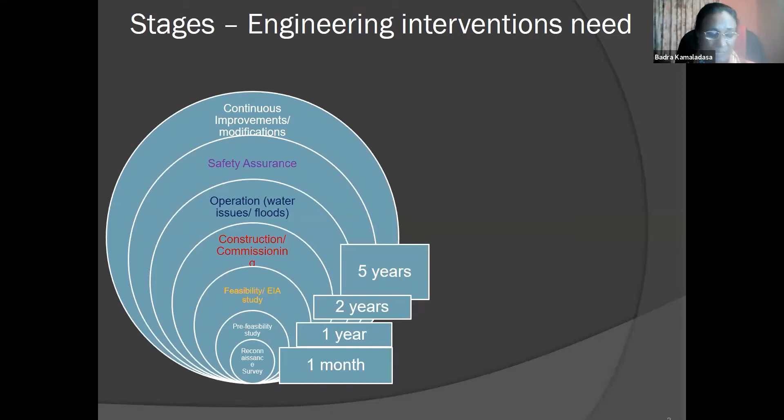So there's no need to say that at each step, involvement of highly experienced engineers and specialists is necessary, as most of the decisions are mainly founded on engineering judgments. So institutional capacity is very vital here: not only the personalities, experts having past experiences, set guidelines and specifications, skilled workers, skilled technicians. All these have to be combined together to make it happen.

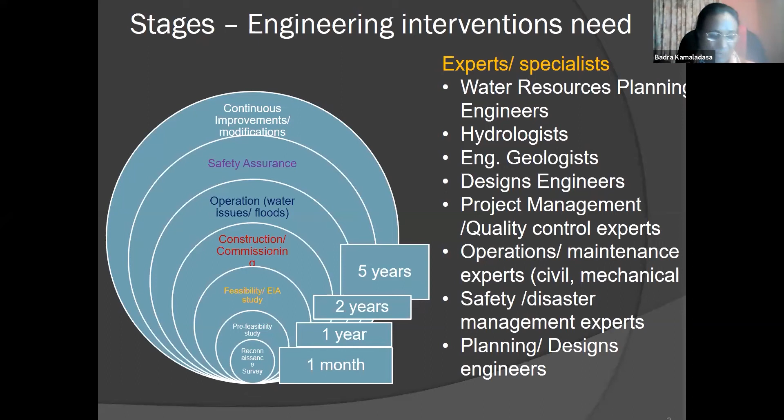So unfortunately, their names are not seen in any plaques that are fixed. At each of the steps, it is teamwork. Decisions need to be taken collectively, taking the subject specialist view into account. So if I go a little deeper and take one activity for you to get an idea, take what we do in the feasibility stage. Here, some basic actions need to be done.

We may need to conduct geological investigations that need to go down to the natural hard rock, many meters underneath, when we are to select the best suitable site for the dam. Then we have to make a good assessment of the prospective irrigable area when the locations and number of sluices are to be decided. The list goes on like this. So the minimum team of experts will comprise at least planning engineers, engineering geologists, hydrologists, surveyors, to name a few.

You also need geotechnical investigation results, surveys covering the whole project area, hydrological models, long-term hydrometeorological local data, and many more. So I'm sure you would have got an idea what precise decisions need to be made at each stage by the subject specialist.

Okay, let us see how the development phases of irrigation systems happened in Sri Lanka. With the currently available authentic literature, I can identify distinct phases, as shown in the graph. From the 6th century BC, starting from Abhaya Wewa in Anuradhapura, development up to much more complicated transbasin diversions is recorded in our chronicles, Mahavamsa, Pujavaliya, and many other chronicles.

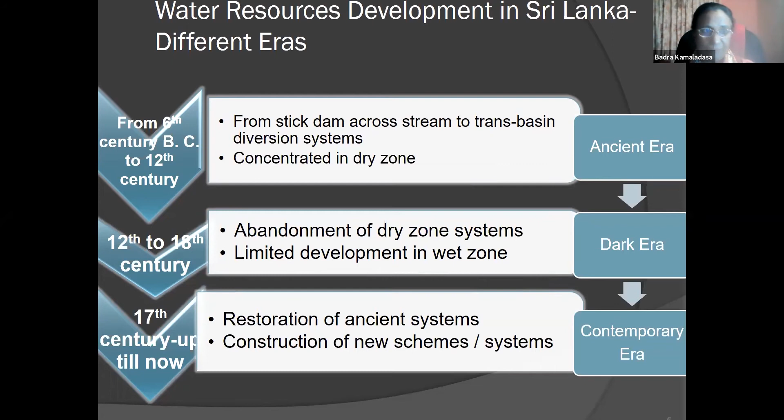Before going into the ancient era, I'd like to tell you briefly what happened during the contemporary era, because we have to understand the whole concept behind it. During the Dutch period, there were a few irrigation engineers employed by the East India Company, by the Dutch government, who had done surveys for restoration of ancient irrigation works such as Kantale Wewa and Giant's Tank in Mannar. They prepared some plans for the restoration.

Then they did some new constructions such as Urubokka Dam in the Southern Province and waterways along the coastal belt, which made some impacts on wet zone agriculture. The British colonial rulers started governing us from the late 18th century. And it is recorded that there were some purposeful destructions done by them to the remaining irrigation systems, especially in Wellassa. Even the British scholars themselves have written about these in their reports. It was after the first rebellion.

Then, however, after the second rebellion in 1848, British rulers realized that the only way to keep the inhabitants occupied is providing them water for their traditional livelihood, that is agriculture. So they started revival of ancient systems as usual, starting from legislations.

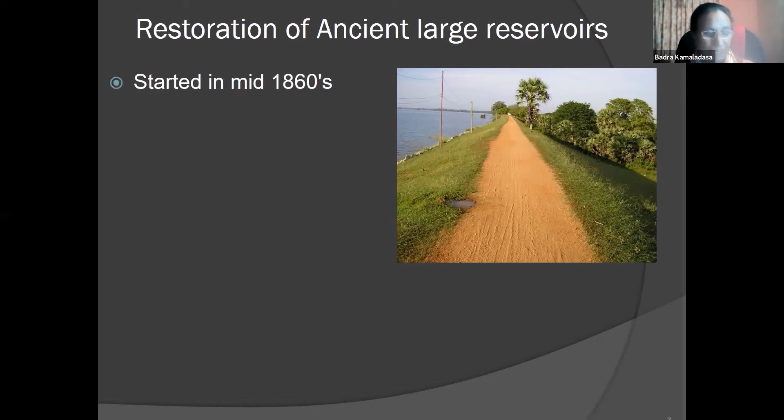Then restoration of large schemes such as Kantale, Kalawewa started in mid 1860s. Actually, the interest of digging out the history of Sri Lanka by the British rulers was a result of translation of Mahavamsa into English in 1836 by a scholar called George Turnour, who was working in Ratnapura Kachcheri at that time, I learned.

So it was a fashion actually among the higher ranking officials of the government, from the governor downwards, to visit the ancient irrigation systems and collect historical, social, and technical information on the schemes, which remain, I must say, valuable records to date. So you can find their handwritten notes at the National Archives if you visit, which I like to identify as the national treasures. So I will complete the story of the contemporary era with this slide.

The two new reservoirs added to our topography in 19th century were Kirama Wewa and Labugama reservoir by the British rulers. They started planning many irrigation systems in early 1900. Iranamadu in Kilinochchi and Unnichchai reservoir in Batticaloa are the first two large scale reservoirs done in early 1900. So they added some flood protection schemes, saltwater exclusion schemes, especially aiming the wet zone agriculture too, introducing new technology to our country.

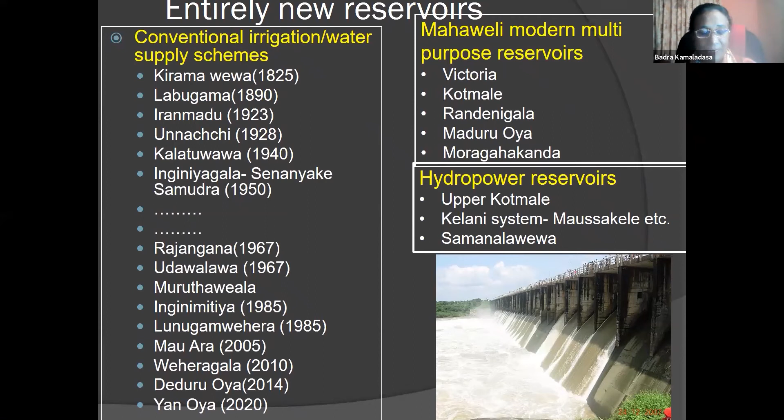So the saga continues. There are more than 50 new large reservoirs by now, which were not in existence during Sinhala Kingdom. So with all these new reservoirs, with the ancient reservoirs, we are a reservoir-rich country, I can say, comparing with the other countries, having a very high density of reservoirs per capita. So having completed the story of contemporary era, let me go back to explain some interesting facts in restoration of ancient irrigation systems.

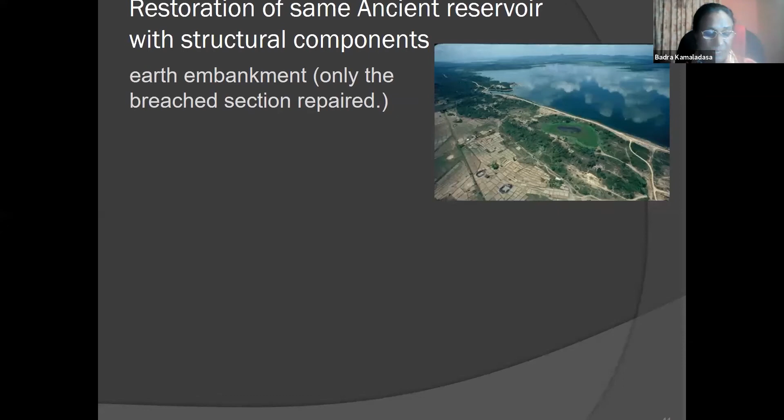Similar to making sound judgments in new construction for new reservoirs, the irrigation engineer needs to look into various factors in finalizing the restoration of ancient systems while planning. So let us see what they have to do. Now, we have to decide whether we can use the same earth bund and remnants of sluices and other components while restoring the ancient system. There may be many instances where the same earth dam and sluices were repaired and treated, while the new spillway was located on the same location that the ancient spill was located by our ancient engineers.

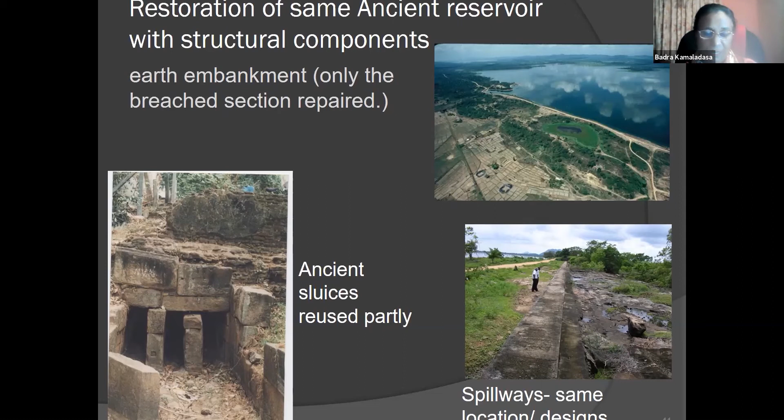So major reservoirs like Kantale, Kalawewa, Nachchaduwa, Hurulu Wewa are some of the examples for such schemes where the same embankment, same dam, and same location for the spill, and also some same sluices were used for the new restoration work. Some ancient abandoned systems cannot be revived due to dilapidated conditions where some components are too weak to get them into the new system. The remnant of the ancient dam in Rambakan Oya, the newly constructed Rambakan Oya, you would have heard about it, is one such example.

Now, you all have got fairly a good idea what sort of irrigation infrastructure is in operation at the moment in our country. So while other countries classify their reservoirs or dams by the height of dam, capacity of the reservoir, construction material of the dam, and the uses and benefits and all that, we have a special unique classification.

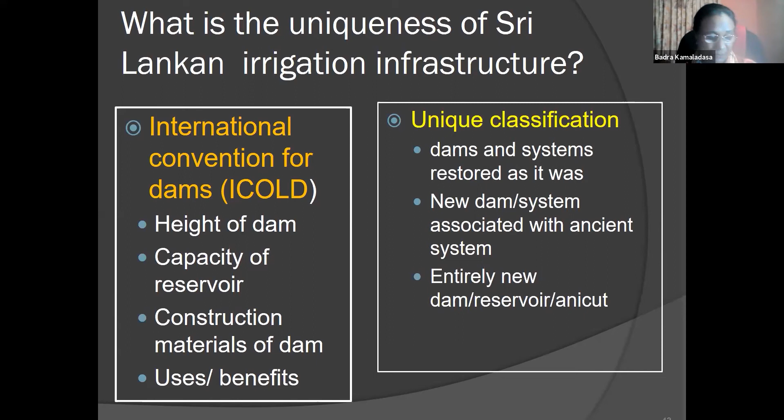So let us now discuss some amazing features of the ancient irrigation systems. That is basically my topic today, features I have observed so far while restoring them. Among many such features, I have selected only a few to highlight here.

If we study the ancient system, we can observe countless varieties of designs adopted by ancient engineers. You can't find this variety in modern irrigation engineering theory books. These are not conventional stereotype designs.

So the selection of suitable sites for dams and spillways, sluices or Bissokotuwa as usually mentioned, for water management, flood management in reservoirs, slope protection in embankments, and transbasin diversion - those are the topics I will briefly discuss today, sharing some of the experience irrigation engineers have gone through.

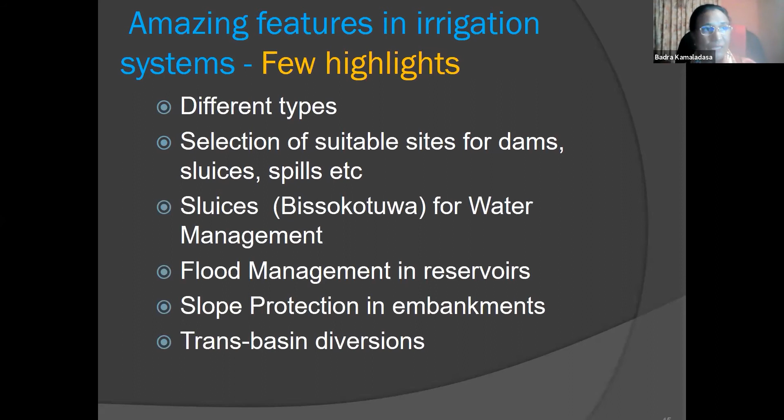The extensiveness and variety of our ancient system were revealed only after the completion of the topographical survey maps covering the whole country in 1900. Until then, no one had a proper account of the irrigation infrastructure the country possessed at that time.

So I want to highlight this topo sheet here. As you all know, this type of topo sheet covers 1,000 square kilometers, and within this area you can count 1,200 reservoirs, including small and medium ones. No large reservoirs are shown here, but you can imagine the extensiveness of our irrigation works all over the country.

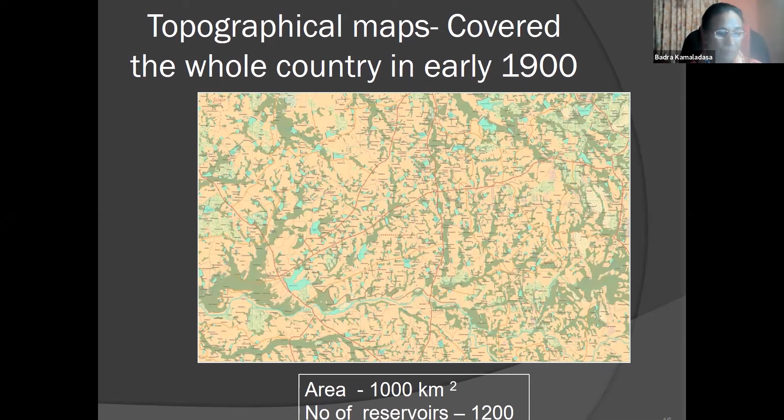Now, if I talk about the different varieties and features of irrigation systems, I would select this one as Type 1: a single small reservoir that evolved at the beginning of the evolution of irrigation systems. Many of you may be familiar with illustrations showing the village reservoir and other associated features.

Scholars have identified that the Wewa or small reservoir is not just a single entity, but many other features have been built around it to ensure sustainability. The social and environmental fabric is closely knitted to the system. For example, to minimize silting and water quality degradation, a tree belt has been introduced around the upstream periphery of the reservoir. Homesteads are located at higher ground downstream, having easy access to the farms. These are only a few features.

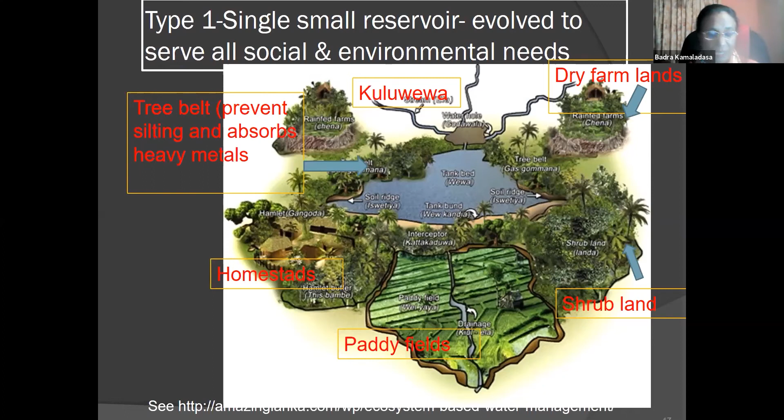You can find a lot of additional reading materials on the internet if you are interested in this regard. Then the second type is...

I would select the cascade system, which most of you know has recently been declared a UNESCO heritage site - the Sri Lankan cascade system. There are 150 cascade systems identified so far.

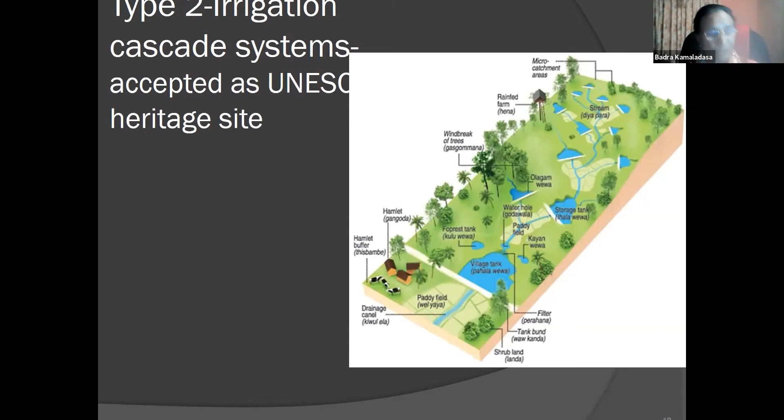Careful study of these systems reveals that small reservoirs in the system are interdependent, and perfect water-saving techniques have been used. These are ideal models to combat climate change impact, because the reservoirs are not independent - they always depend on each other, and water from upstream feeds the downstream reservoirs. Water shortage is rarely seen in this type of system.

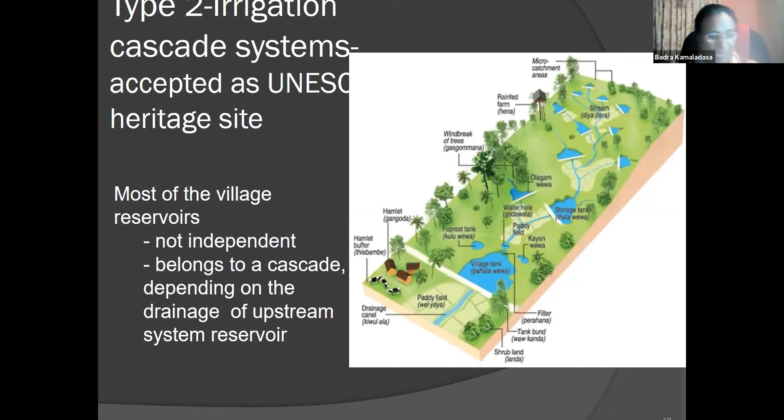Another type I want to highlight, the third type, is barrages across the main river. Even though international terminology calls them barrages, in our country we call them anicuts. These are especially constructed across major rivers - Minipe across Mahaweli, Alahara - these are very familiar names to you.

Another example I want to quote here is the Tekkam anicut, across the Malwathu Oya in Mannar. I'm sure many of you would have visited that place. If anyone in the audience has seen how violent the Malwathu Oya river is during floods, I ask them to think how this amazing structure remains intact for many centuries and has withstood countless flood events.

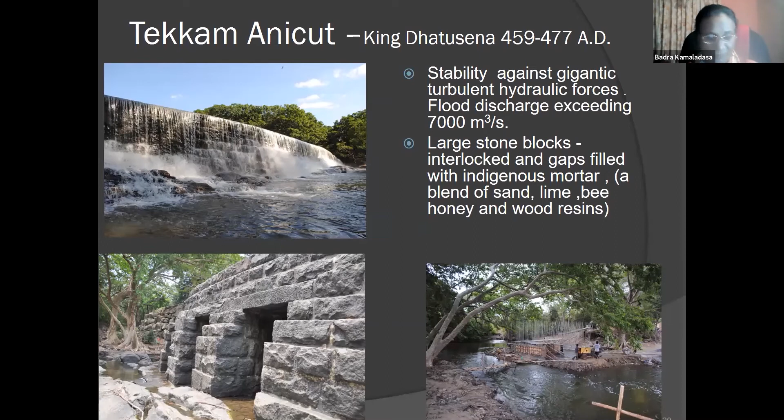Now, this is the fourth type I want to introduce as a next variety. This is Padaviya Reservoir that has only one sluice, and it releases water not to the main canal, but to the main river again.

Then pickup anicut, located downstream, distributes water to the irrigation system. This is a very unusual design. One cannot find it in the textbooks.

So when the British engineers conducted surveys in the 1880s to restore Padaviya Reservoir, they couldn't understand the design concept of the system. Most of you have heard about Henry Parker, a well-known famous British irrigation engineer, who studied the ancient irrigation systems and recorded in 1889 in one of his notes this quote: 'We may not be able to put this into a known design model now, but the long experience the Sinhala engineers had over thousands of years would not have done a mistake. It will take some time to realize what is the concept behind this.'

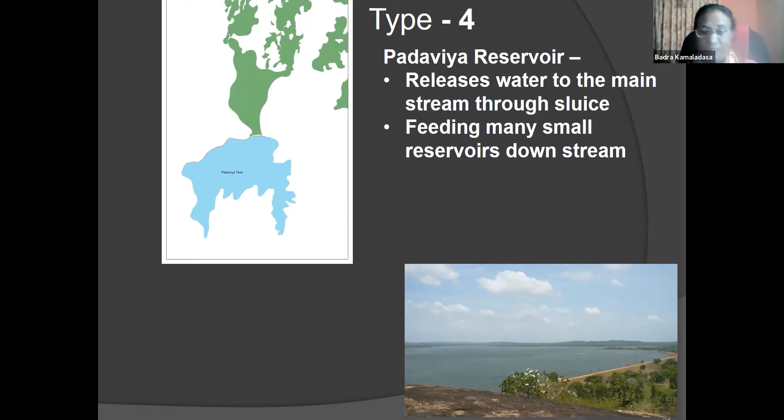So only in the 1950s could the irrigation department understand the concept behind it, and it was able to restore the dam that was 3.2 miles long, having a capacity of 85,000, and feeding nearly 13,800 acres of land.

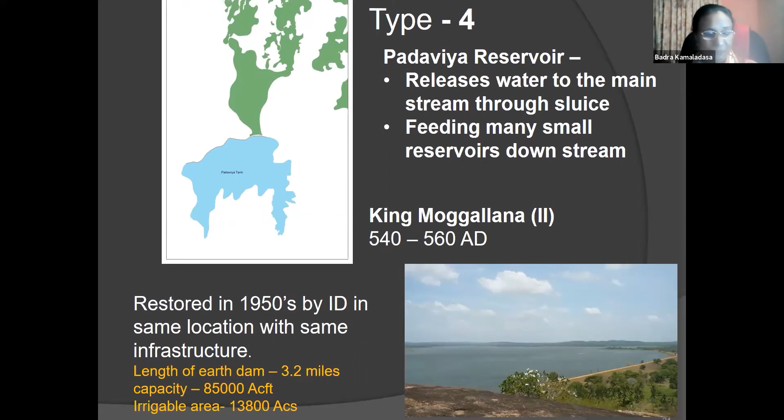Then the other type, these are very peculiar systems, that cannot be found anywhere else in Sri Lanka except in the Mannar area. And to my knowledge, you can't find it anywhere else in the world. So the giant tank is located in a small drainage basin. It is not located in the Malwatuoya basin, but adjacent to it, in a very small drainage basin.

What happens here is the reservoir gets filled up through the feeder canal from Tekkam anicut, which I showed in the previous slide.

Then there are nearly 162 small shallow reservoirs in the irrigable area. You can see the irrigable area with some blue reservoirs shown, but not all 162 small reservoirs are shown here. The irrigable area will be filled by the 10 major canals in the Maha season, to cultivate about 30,000 acres.

What happens during the Yala season is the water inflow is not sure. It will be unpredictable water that they get through Malwatuoya. So what they do is the small reservoir beds get converted to paddy fields, and cultivation is done on the Bethma method, limiting the acreage, while direct issues are fed by the main canals.

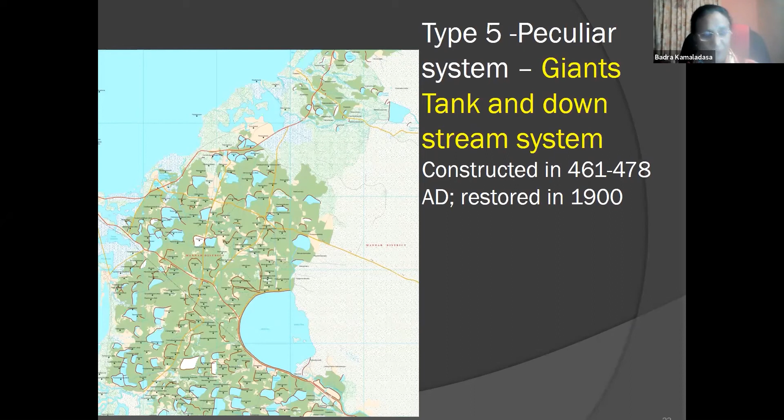Then the sixth type: this is a reservoir constructed not across the main river, but with a dam running parallel to the river bank. Usually a modern irrigation engineer will select a dam axis crossing the river. But here, it is not only Rugam — there are many other reservoirs like this.

Rugam River — the reservoir was constructed not across the main river, but on a small tributary coming to the main river. And the dam, you can see, is running parallel to the river. The river was flowing like that, and the Rugam Bund is parallel to the river. So again, this is a very unusual type.

And then the water is released — how? The Rugam tank gets water from a feeder canal built upstream of the river, and with the augmented water, the reservoir releases water again to the main river, to cultivate the irrigable area about 20 kilometers downstream.

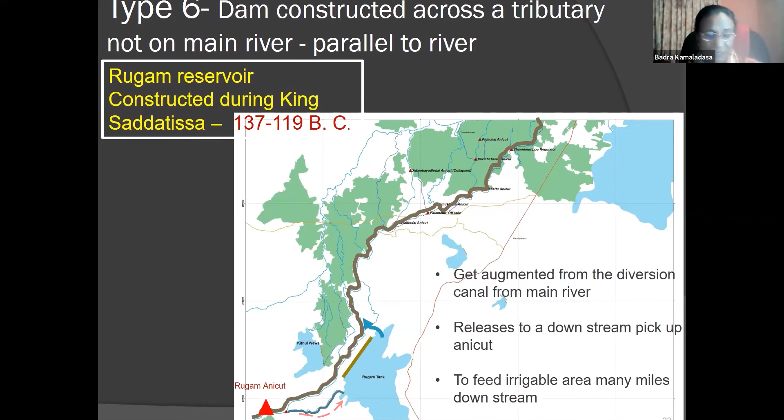Please keep in mind that this concept was developed in the 2nd century BC, not during the modern era. So how did they do that? How did they conceptualize this type of complicated system without drones, without precise survey instruments? That is still a mystery.

Then the other type: we can cite large irrigation schemes such as Kalawewa, Parakrama Samudra, which are made by combining many reservoirs. These large reservoirs are not a single one-shot construction, but evolved through centuries. You can see that in Kalawewa, the Balalu Wewa was first constructed by King Kutakanathissa.

That is in 44 BC, according to the records in Mahavansa. And then the next section, Kalawewa, the main Kalawewa reservoir, was built by King Dhatusena, as we all know, in the 5th century AD.

My observation is how they needed to have amazing knowledge to align those dams across different tributaries to finally form a single reservoir. So how did they do that? Similar to Kalawewa, Parakrama Samudra also consists of 7 small reservoirs, as you would have heard.

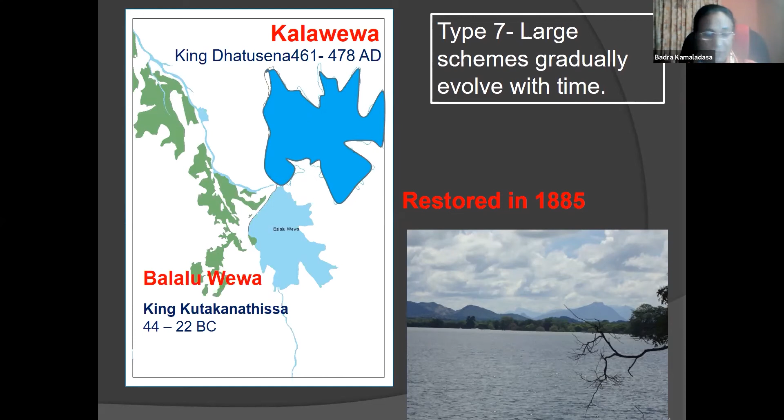Then the next type is the most advanced stage, I must say: transbasin diversion. I define it as the pinnacle of ancient irrigation technology we had. Imagine water transferring from Kalawewa to Tissa Wewa, going through an 87 kilometer length canal through gravity. Even now, with precise survey instruments, we have to put several experienced experts together, and it is not one man's job but several people's work over a few months or years to set out a canal like this.

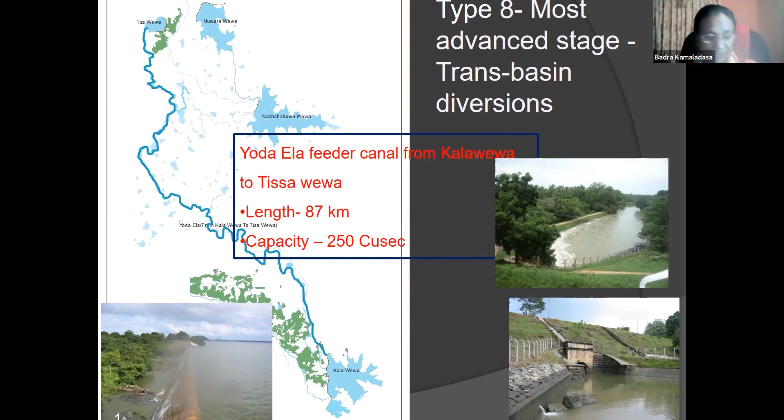So the next amazing feature in ancient technology, as I listed out, is the selection of suitable sites for the dams, sluices and spills. Now, when locating Maduru Oya...

You can see this topo sheet. I am not sure whether it is clear on the screen. When locating the Maduru Oya Dam under the Accelerated Mahaweli Project, the planning engineers in the modern era had this topo map. It indicates the best suitable site, ideal with topographical features for a large reservoir, so they wanted to locate a large reservoir here. But you can see in the topo sheet from 1975, it shows only a small reservoir, a trace of just a small abandoned reservoir with a small dam. So while doing the feasibility study, the engineers came to know the extent of the ancient reservoir, and it was close to the new design.

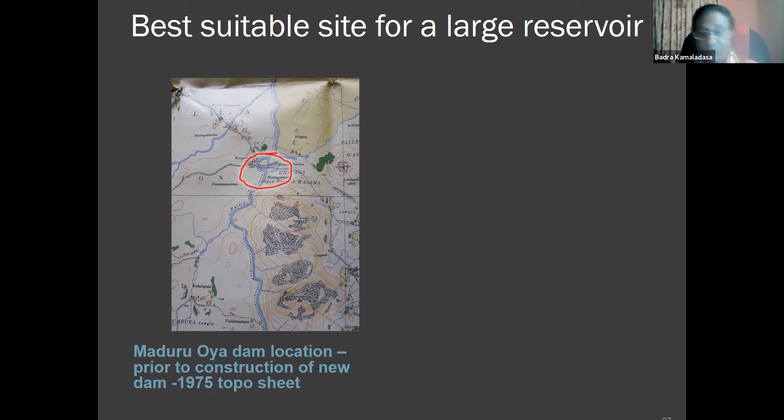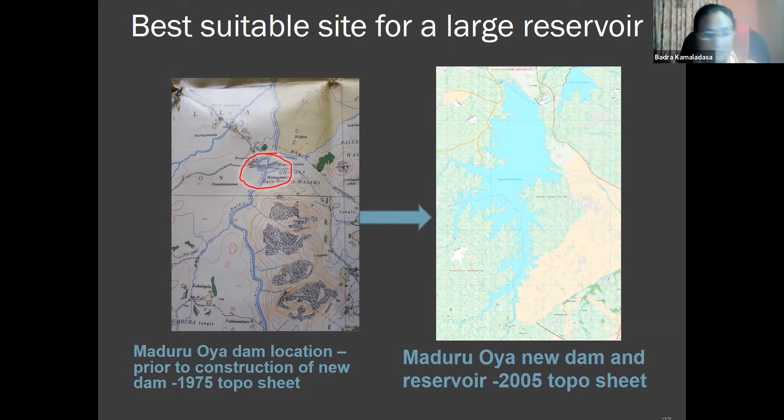You can see in the new topo sheet, which I took in 2005. Comparing to that, they would never have thought that a large reservoir on that scale would have existed in the past. So, selection of suitable sites.

Ancient engineers selected the most suitable sites to locate the spill. That is another amazing capability they had. One needs to judge whether the downstream of the spill can handle many considerations when locating a spill, whether it is capable of absorbing the giant force created by spill water, foundation conditions, and things like that. In many large schemes we restored, like Nachaduwa or Kalawewa, the spill site has sound rock outcrop, which prevents scouring and is very suitable for today's spill location as well.

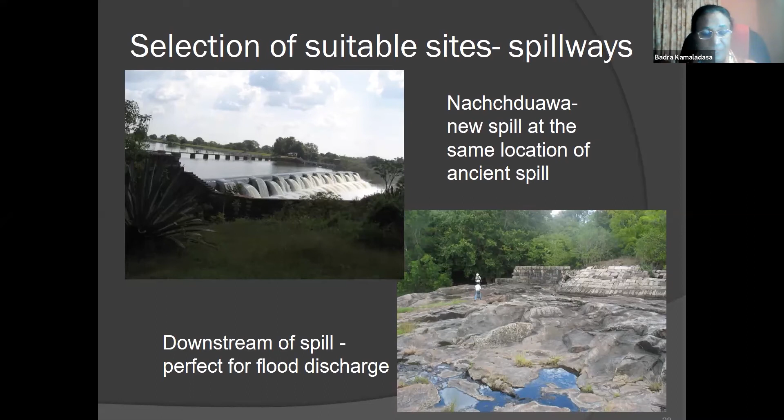Then conventionally, selecting a suitable site for a sluice is again a challenge for the irrigation engineer. The ancient engineers selected the most suitable sites for these structures. Usually in modern dams, the sluice is located in the main dam. But in this ancient Vahenery scheme, the sluice is located not in the main dam but in the saddle dam. The sluice feeds the irrigable area through the main canal in another place, via some other way.

The modern planning engineer has to go through hydrological, geological, and structural considerations. Ancient engineers must have considered all these things too, even though we don't have any trace of their records.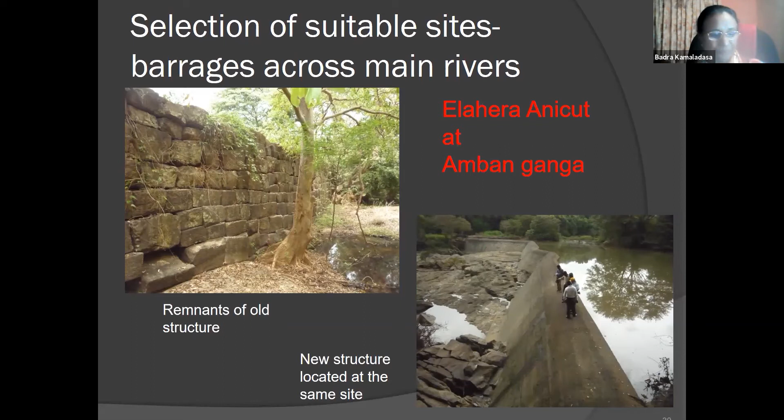Then the sluices in the Biso Kotuwa, used to control release of water, are another marvel. If you go into more detail, we were talking about the suitable selection of sites for the dams. Now I am going into more detail about the Biso Kotuwa.

I'm sorry, it's 32. Yeah.

Here again, it is not the typical uniform sluice you can find in ancient systems, but a vast number of varieties. Actually, the British engineers recorded that they found valve pits, as they called it in the 19th century, that is available only in Sri Lanka, and suggested that it is one of the crucial factors that contributed to the success of our ancient irrigation system. So that is why the Bisokotuwa is always quoted as a marvelous feature in our ancient system.

Now, this is the famous Sorobora sluice. Many of you would have seen this. That is carved through the natural rock. Two sluices are there in the dam in both ways. So I wonder whether any modern engineer would have got such an imagination and skill to transform his or her design concepts so precisely.

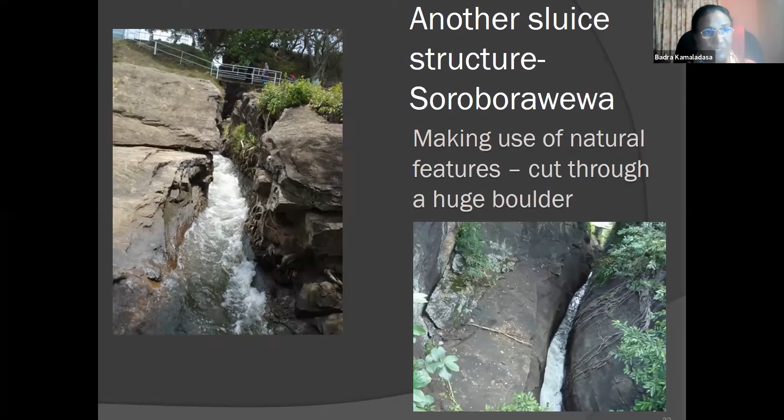It is amazing. And then Maduru Oya sluice is one of the most quoted structures in ancient hydraulic civilization. Many of you would have seen these photographs earlier. What I want to highlight here in my slide is the 66-meter long sluice barrel found at the site. You can see a sketch at the left-hand side bottom. It was taken from a paper done by late Professor Leslie Gunawardena. The 66-meter long barrel found at the site has shown amazing design features.

It is a popular story that you also have heard, the find of the ancient sluice when the modern engineers did excavation for a new sluice, and we have seen advertisements in media as well on this story. But there was so much more to add. One similarity, the sluice barrel that was found at the site, the orientation is the same as the one the modern engineer had selected, and the special design features were adopted to diffuse the negative pressures in the sluice barrel. Usually that is a serious problem faced by the irrigation design engineer.

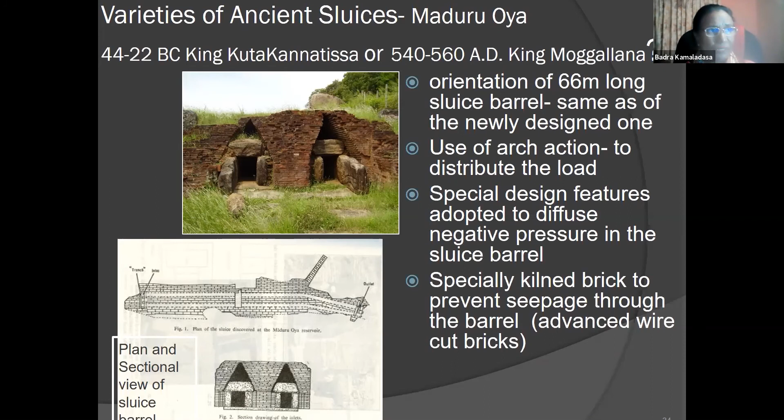There are many technical papers written on this by the Canadian engineers after conducting carbon dating tests, and also, as I mentioned earlier, a very informative paper done by one of our great historians, late Professor Leslie Gunawardena, if anyone is interested in reading. And there are many unrestored ancient sluices still hidden in the jungle that we can do research around and probably find out more on this amazing technology. So those are some pictures I have taken during inspection of those ancient hidden treasures.

Then slope protection is another feature I have selected to highlight in my presentation. That can be observed in many ancient reservoirs still. So one can find the ancient riprap serving as wave absorbers. On the left-hand side is the ancient riprap in Giritale, and you can find it in Nachchaduwa, Thuruwila and many other reservoirs as well. Those are still intact.

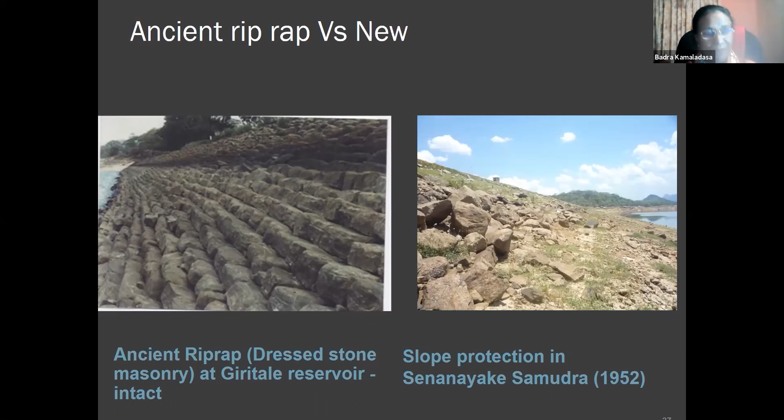Then I have put another photograph to compare with the riprap that was designed in the 1950s under the current design guidelines, under the current knowledge we have. So you can compare these two and see the difference. So we can admire our ancient technology compared to this type of feature.

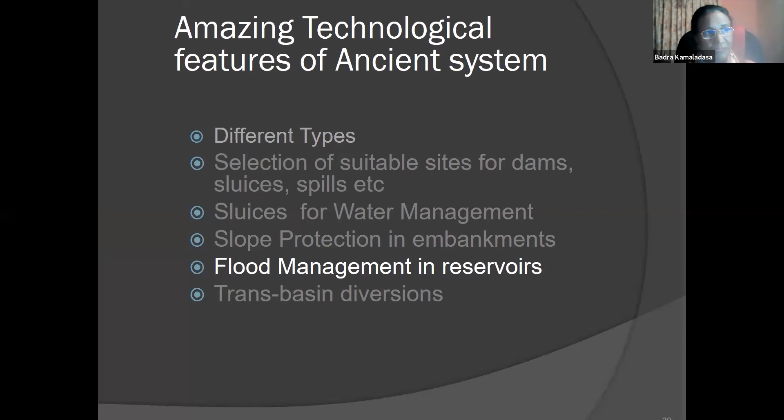Then the next point I want to highlight is another amazing feature of flood management in the reservoirs. Flood management is, I must say, the most critical challenge that water resource engineers face even today, because there are so many factors to be considered. So tedious calculations are there to decide the gate sizes, number of gates and things like that to allow the spill water.

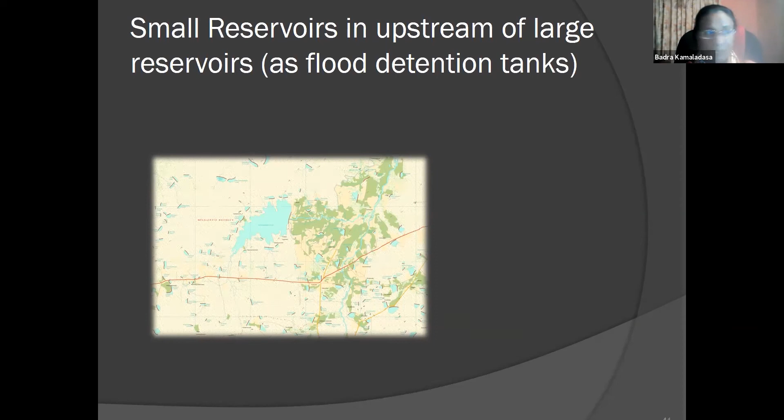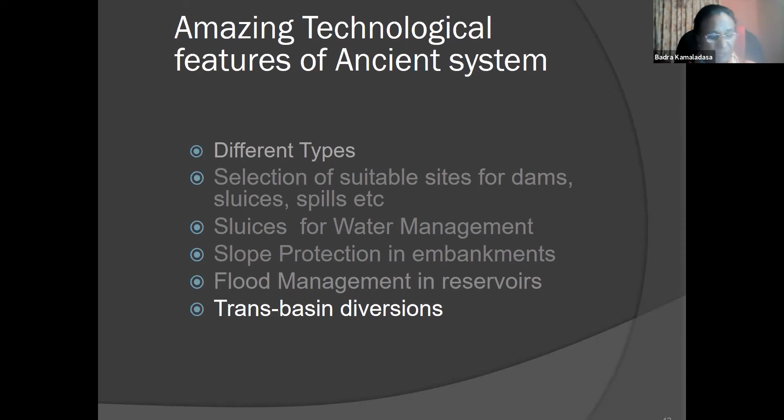Then, under the different varieties, I want to highlight the transbasin diversions. Again, it is the highest achievement by our ancestors. This is considered the most effective climate resilience measure nowadays in the water sector in the current context, actually.

But post-construction water management, we know, in managing water not only during the water shortage period but during the flood period also, it is a huge challenge for the water resource engineers, irrigation engineers, to manage this type of a complicated structure.

Now, in the current context, we have a lot of committees, a lot of intergovernmental organizations, decision-making committees to manage this type of structure. So I am wondering, in the ancient system, what were the mechanisms they used? How did they manage? This was there in the ancient era as well. Still there are a lot of things unknown to us. We don't know what happened during that dark era or even the ancient era. No proper records are available.

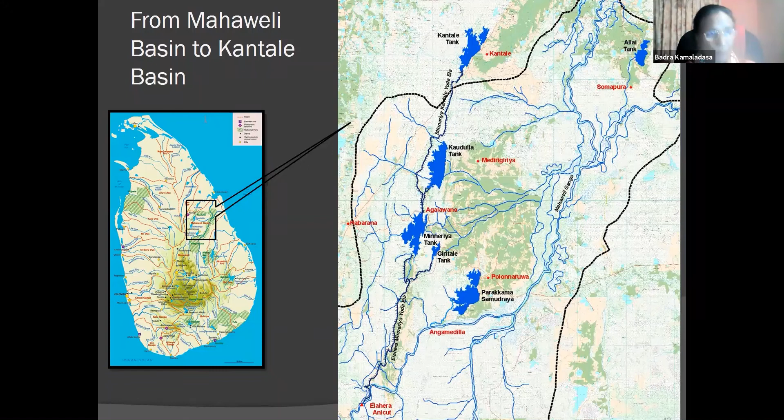So with that note, I want to conclude my presentation. Let us enrich the database of ancient marvels and make the local and international community aware of our unique heritage. There may be a lot of things that we still have to find out and learn, as mentioned at the beginning. There may be a lot of things that modern engineers can take into their designs as their lessons. So I would like to hand over the podium again to the organizers.